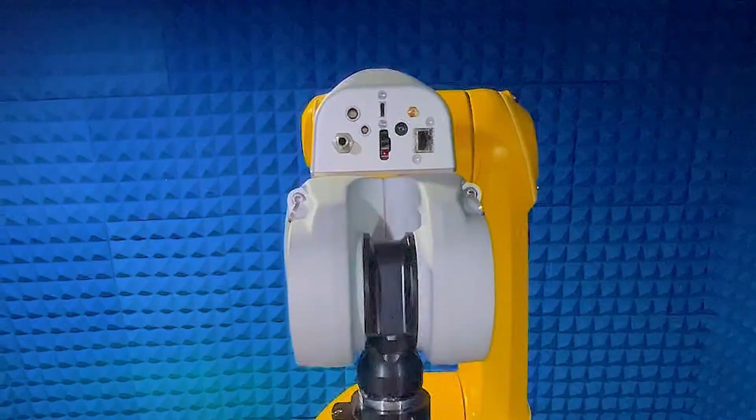I am also pleased to see that the new electro optic converter interface has all the interfaces for all future products, such as the power supply, the Ethernet, the USB, the optical, as well as the pneumatic, among others. I will not be able to demonstrate all the new hardware components in a single video. So instead, today, I will focus on the new DASY8 Module SAR software release version 16.

This software release includes many of the long awaited features, such as the possibility to combine area and zoom scans for assessment of multiband SAR, evaluation of SAR to peak location separation ratio or SPLSR, more effective measurements of the system noise, probe linearity, and general troubleshooting with the new multimeter job, a more user friendly graphical user interface that integrates tightly with the new hardware for faster robot movements and better performance, and importantly, an extended API interface.

The speed improvements of DASY8 compared to DASY6 are not that impressive yet, except for the area scan. But SPEAG assured us that they will make this a priority for the next release. Back to the new features, and in particular, a very important one we have been waiting for a long time, namely the multi-band SAR post-processor.

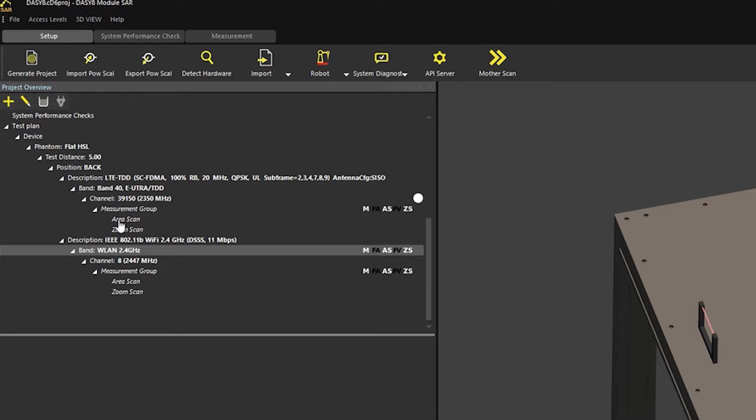First, I create a project file in the usual manner consisting of the two test cases for LTE TDD band 40 and Wi-Fi 802.11b at 2.4 GHz midband. The test cases are at the midband frequency with 20 MHz channel bandwidth. For each test case, I set user-defined grid settings to offset the area grid to the bottom edge of the phone. The area and zoom scans are widened to include both antennas.

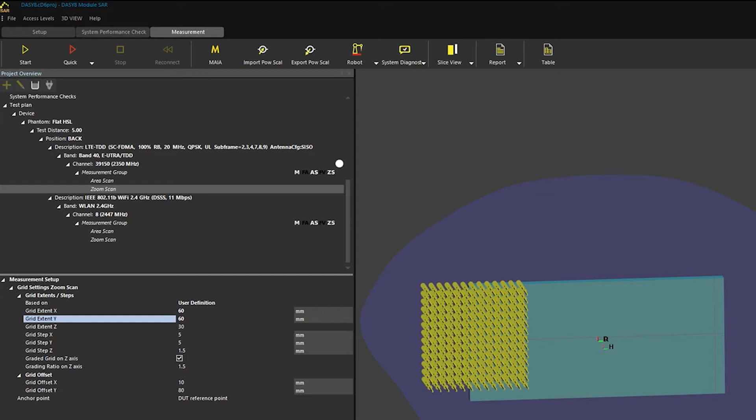The phone is now positioned beneath the phantom. I now press start to measure the project. The LTE test case is measured first with the automatic call setup. I accelerate the video. The LTE measurement is finished.

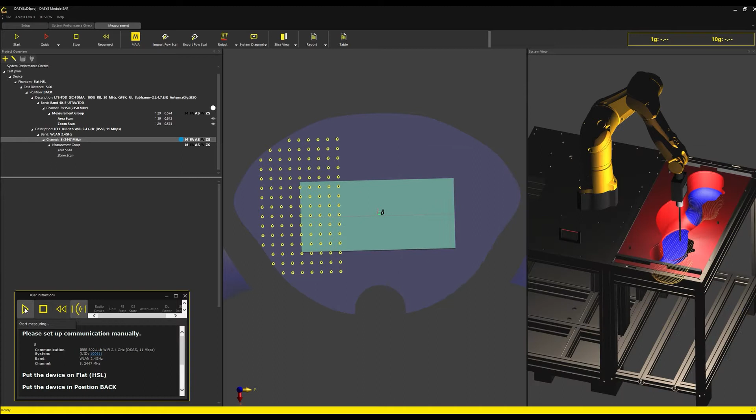To set up the Wi-Fi measurement, I connect the device to the computer through the USB port without disturbing the device mounting position, and then use the field test mode software to set it to radiate at 802.11b DSSS mid channel. The radiation is verified on the connected spectrum analyzer screen. The USB connection on the phone is disconnected, and I now start the DASY8 measurement. I accelerate the video. The measurements are now finished.

As we see, the 1 gram SAR values for the two cases are 1.29 watt per kg and 0.477 watt per kg. A simple algebraic addition in this case exceeds the FCC SAR limit, and a detailed evaluation is necessary. First, we click on the two area scans and combine them. This creates a new test case in the project tree.

The software calculates the combined SAR value for this new test case using the Motorola Fast SAR algorithm, which assumes an exponential decay in the z direction. The combined area scan also shows the SPLSR ratio, which is 0.110 in this case. As this ratio is more than 0.04, it means that the distributions overlap to a considerable extent.

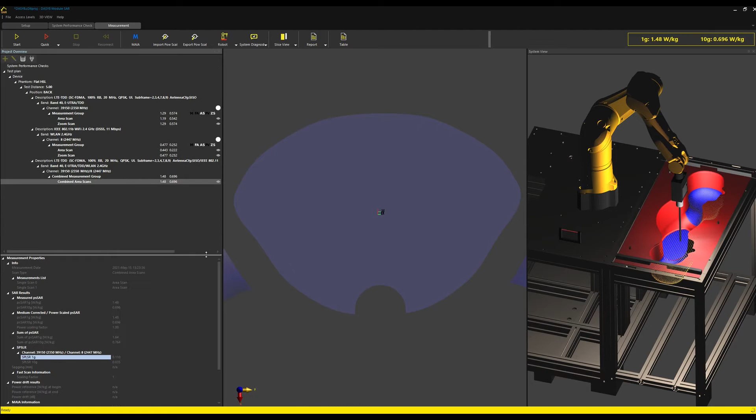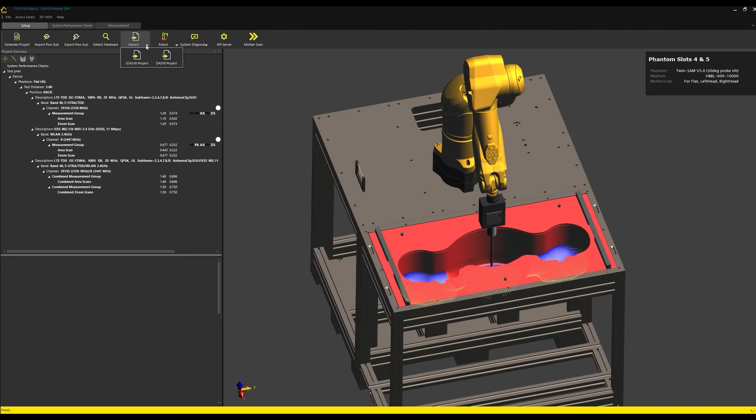Next, I combine the two zoom scans using the same process, and the new test case in the project tree shows the combined SAR value as 1.59 watt per kg, which is within the FCC 1 gram limits. I also wanted to test the feature of combining measurements performed with different systems. So I had performed the same configuration at the SAM flat phantom using our DASY6 system. I will try to open the file now in DASY8 and combine with the configuration I just measured with DASY8. It all works.

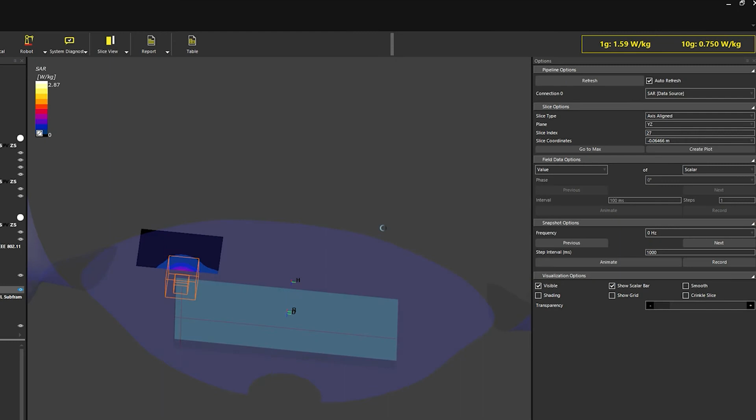Clicking the eye icon next to the combined zoom scan shows the combined SAR pattern in a 3D window. Detailed scan reports can be generated using the Word or HTML template. The detailed reports show the individual area and zoom scan values, the combined SAR values, and the combined SAR plot.

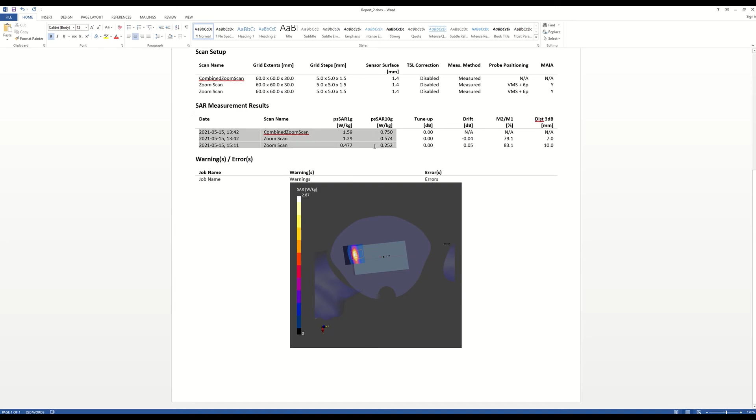The new multi-band combiner feature of Module SAR 16.0 is well implemented. It maps the measurements taken in the twin SAM phantom to the reference phantom, which now enables combining measurements performed at different systems taken in the twin SAM without impairing the precision. This works for the area and zoom scans as demonstrated. The next release will also permit combining the scans in specific phantoms such as the headstand or face down phantoms.

Congratulations, SPEAG. Next time, I will also look more closely at the new features and improvements in DASY8 hardware.